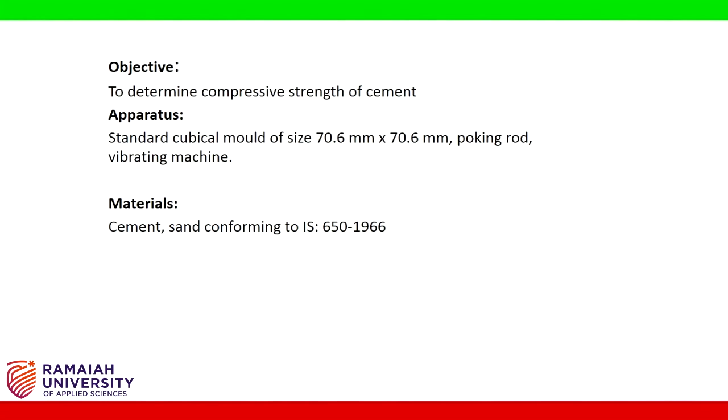Hello friends, with this experiment we are determining the compressive strength of the given sample of cement. Apparatus: standard cubical mold of size 70.6 mm x 70.6 mm, poking rod, vibrating machine. Materials: cement, sand conforming to IS 650 1966.

Strength test is not made on cement paste because of the difficulties of excessive shrinkage and subsequent cracking of neat cement paste. Hence, strength is found indirectly by conducting test on cement sand mortar cubes. The sand to be used for the mortar shall be a mixture in equal parts of grade 1, 2 and 3 of Ennore sand, that is standard sand. The ratio of cement to sand in the mortar shall be 1:3 by weight.

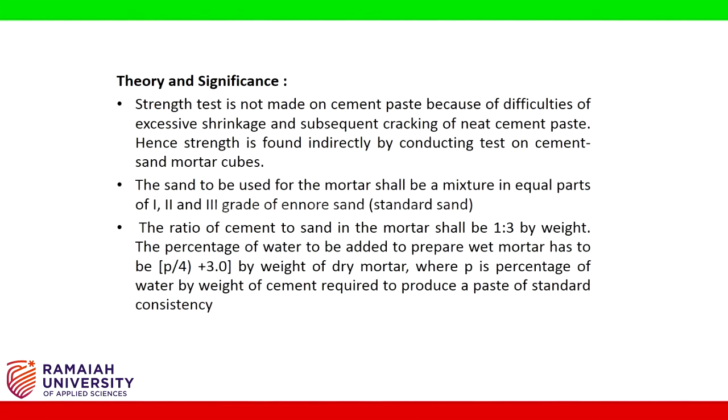The percentage of water to be added to prepare wet mortar has to be P/4 + 3 by weight of dry mortar, where P is the percentage of water by weight of cement required to produce a paste of standard consistency. Procedure: preparation of test specimens. Clean appliances shall be used for mixing, and the temperature of water and that of the test room at the time when the above operations are being performed shall be 27 ± 2 degrees Celsius. Potable or distilled water shall be used in preparing the cubes.

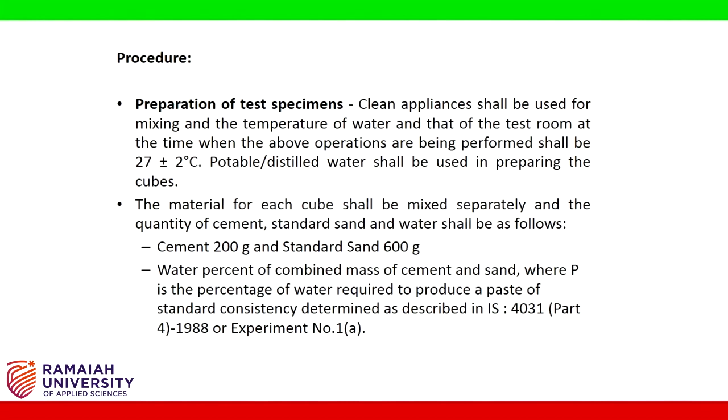The material for each cube shall be mixed separately, and the quantity of cement, standard sand and water shall be as follows: cement 200 grams and standard sand 600 grams. Water (P/4 + 3) percent of combined mass of cement and sand, where P is the percentage of water required to produce a paste of standard consistency, determined as described in IS 4031 Part 4 1988 or experiment number 1A.

Place on a non-porous plate a mixture of cement and standard sand. Mix it dry with a trowel for 1 minute and then with water until the mixture is of uniform color. The quantity of water to be used shall be as specified in step 2. The time of mixing shall in any event be not less than 3 minutes, and should the time taken to obtain a uniform color exceed 4 minutes, the mixture shall be rejected and the operation repeated with a fresh quantity of cement, sand and water.

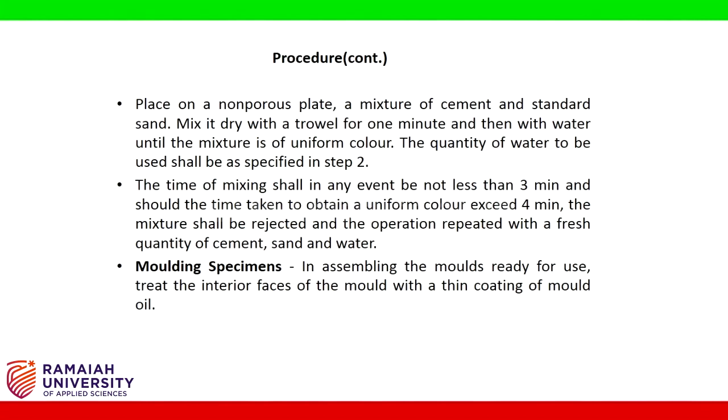Molding specimens. In assembling the molds ready for use, treat the interior faces of the mold with a thin coating of mold oil. Place the assembled mold on the top of the table of the vibration machine and hold it firmly in position by means of a suitable clamp. Attach a hopper of suitable size and shape securely at the top of the mold to facilitate filling, and this hopper shall not be removed until the completion of the vibration period.

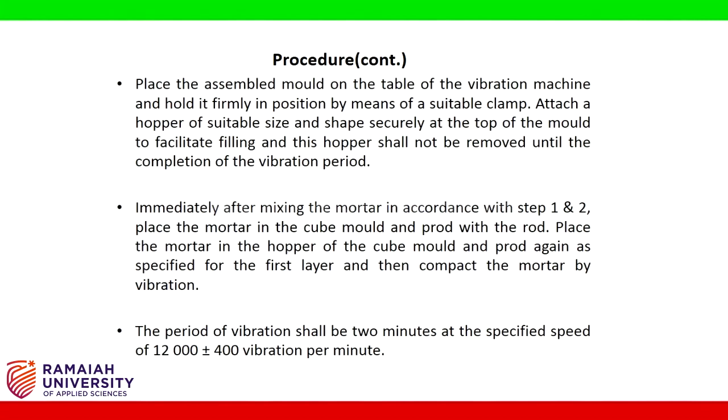Immediately after mixing the mortar in accordance with step 1 and 2, place the mortar in the cube mold and prod with the rod. Place the mortar in the hopper of the cube mold and prod again as specified for the first layer, and then compact the mortar by vibration. The period of vibration shall be 2 minutes at the specified speed of 12,000 ± 400 vibrations per minute. At the end of vibration, remove the mold together with the base plate from the machine and finish the top surface of the cube in the mold by smoothing the surface with the blade of a trowel.

Curing specimens. Keep the filled molds in moist closet or moist room for 24 ± 1 hour after completion of vibration. At the end of that period, remove them from the molds and immediately submerge in clean fresh water and keep there until taken out just prior to breaking. The water in which the cubes are submerged shall be renewed every 7 days and shall be maintained at a temperature of 27 ± 2 degrees Celsius. After they have been taken out and until they are broken, the cubes shall not be allowed to become dry.

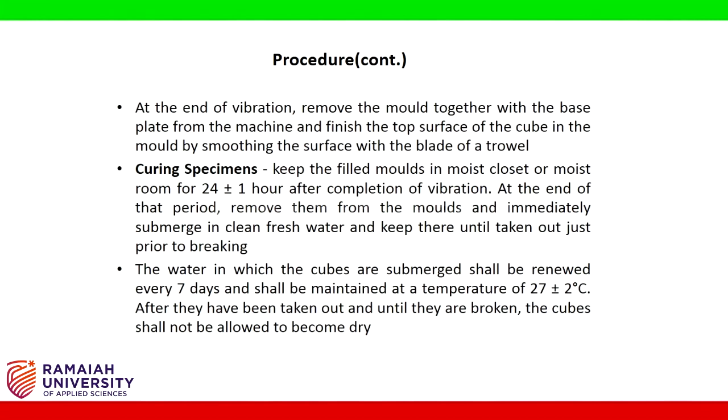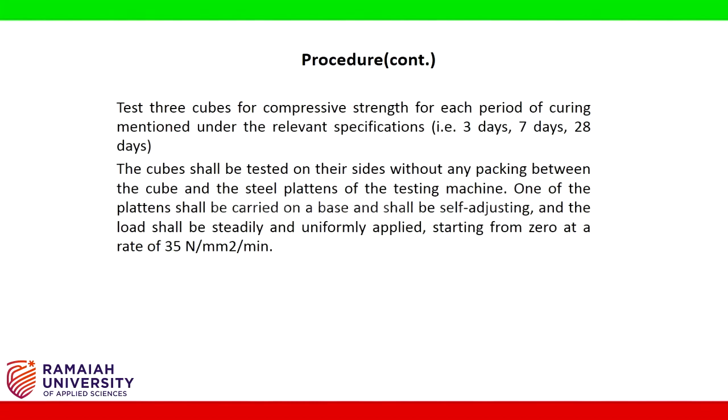Hi students, now we will be doing the experiment on the compressive strength of cement mortar cubes. So if you have come across the different grades of cement, like if I take up OPC, you have 33 grade cement, 43 grade cement and 53 grade cement. What does that number indicate? The number indicates the compressive strength of cement mortar cubes at the end of 28 days of curing. Okay, so now we are going to do the casting of a specimen and we are going to check the grade of cement which is used for that particular mix.

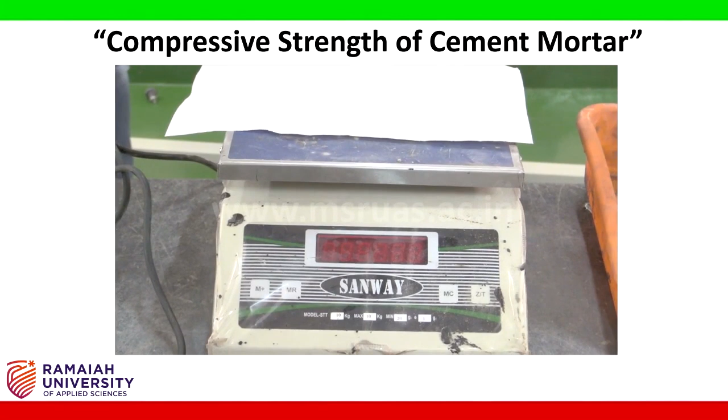So the apparatus required for this particular experiment is, one is the weigh balance of 1 gram accuracy, the cement, what I have taken is OPC 53 grade cement, sand, zone 2 sand has to be used, the mold, the mortar mold which is having a dimension of 70.6 by 70.6 and the base plate of it, mixing tray.

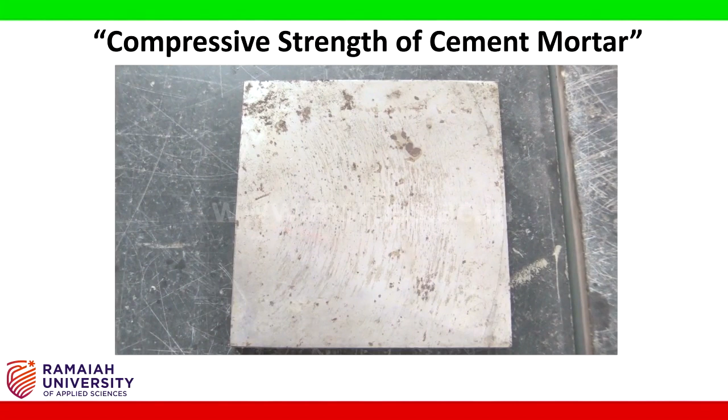We also want the gauging trowel and the water for preparing the mortar mix. Now let's start the experiment.

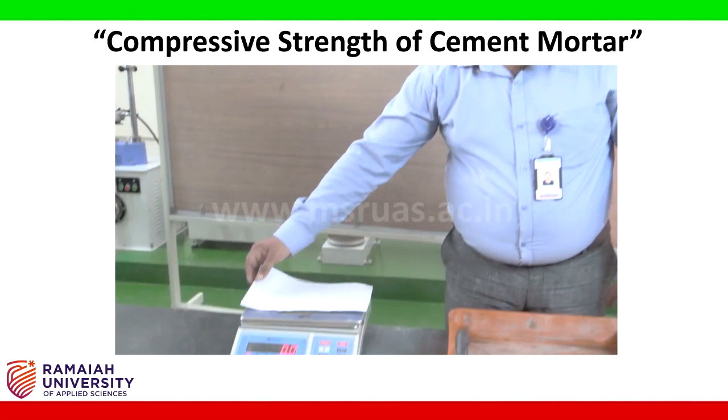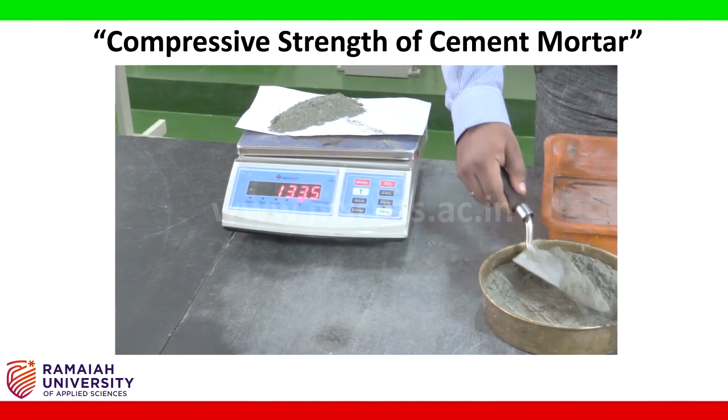I am going to take 200 grams of cement. I have taken 200 grams of cement.

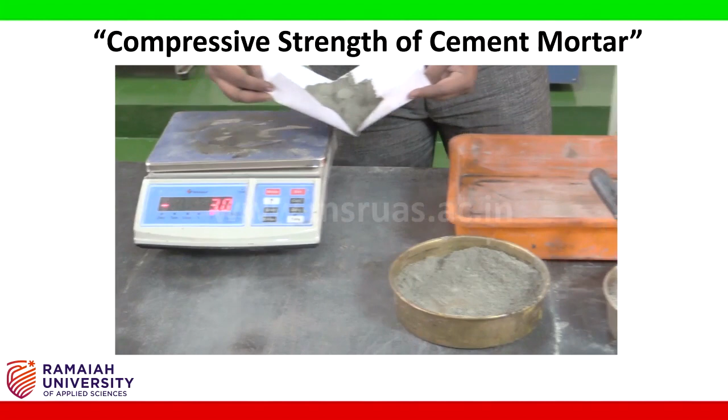I am also going to take up 600 grams of sand. If I take up 600 grams of sand, it becomes a ratio of 1:3, 200:600.

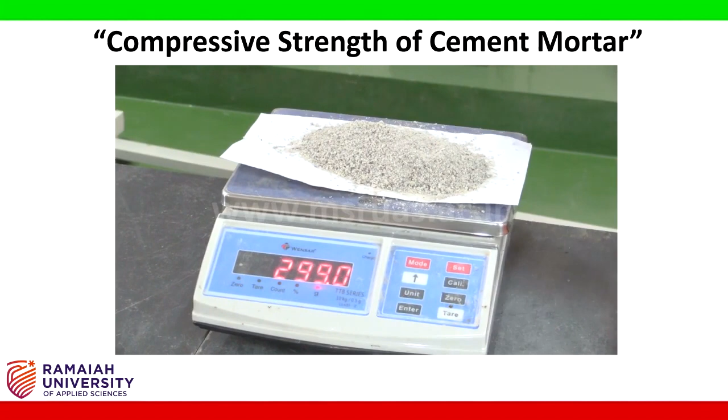I am going to add it in 2 stages. I am just adding 300 grams. Once again I am going to add 300 grams.

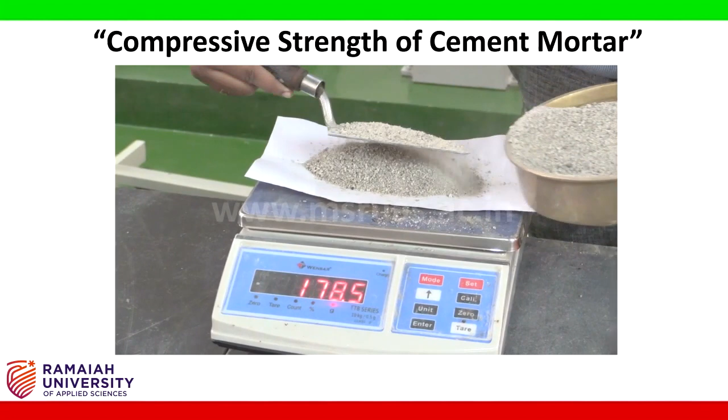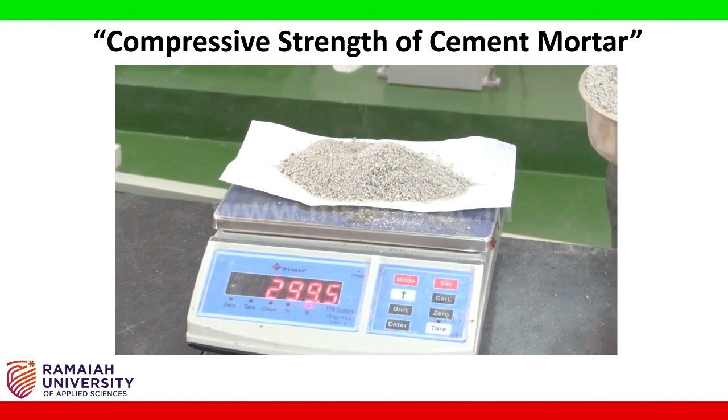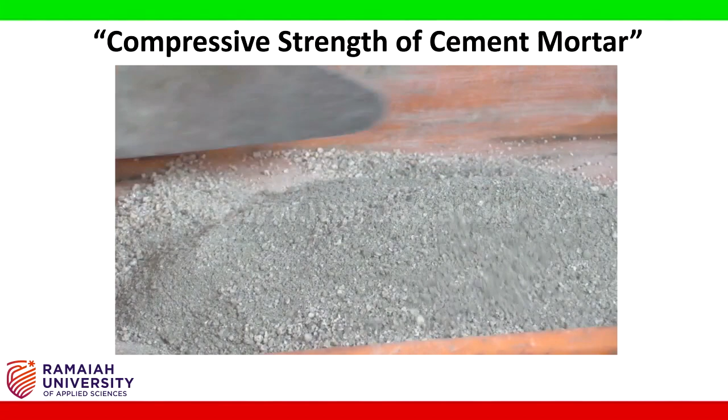I am going to dry mix the cement and fine aggregate sample. You can do this hand mixing or you can just go on with mixing the mortar using the mortar mixer.

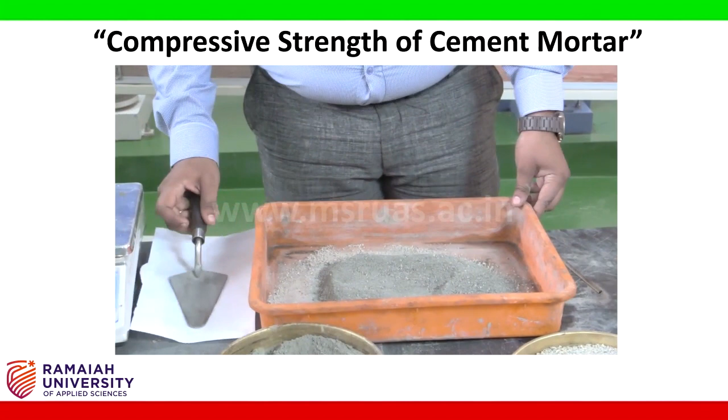Now I'm going to add the water to it. How much water is to be added? It will be P by 4 plus or minus 3%, where P is the normal consistency.

If the aggregate is in a wet condition, we are going to deduct minus 3%. If the aggregate is over dried, then we are going to add 3%. In our case it's a normal fine aggregate, so we are going to make sure that it will be added at P by 4 percentage.

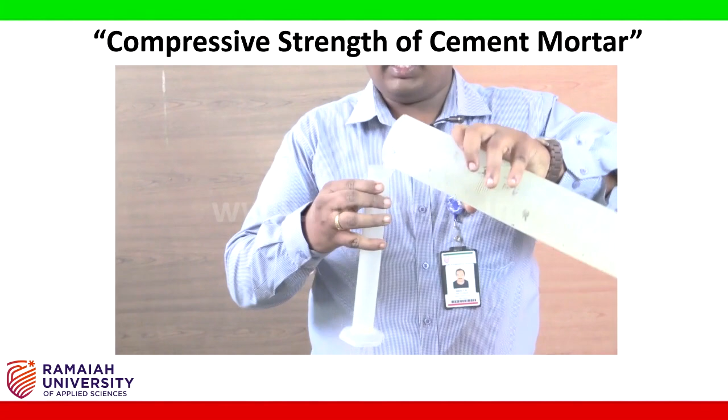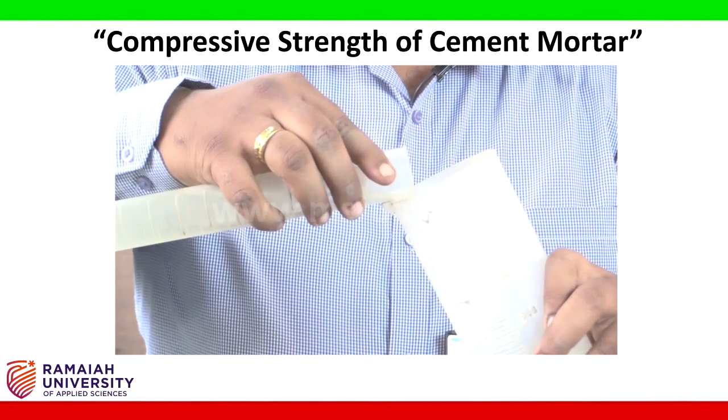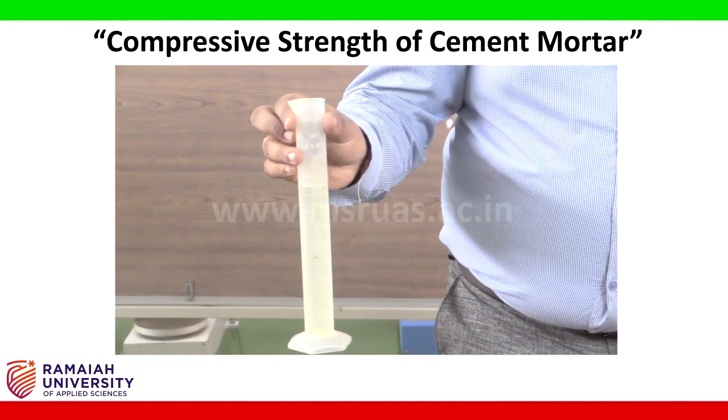So I calculated earlier, it will be 84 ml. I have taken 84 ml of water. I am going to add it to the dry mix

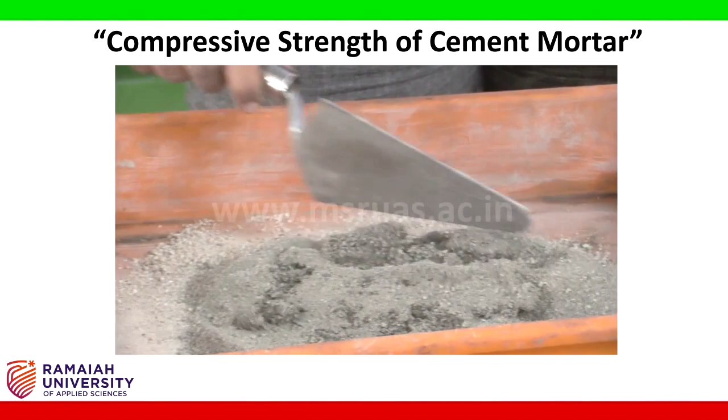and I am going to mix it well. This is a prepared mortar mix. So as I told you, we can just go with the manual mixing or we can go with the mixing

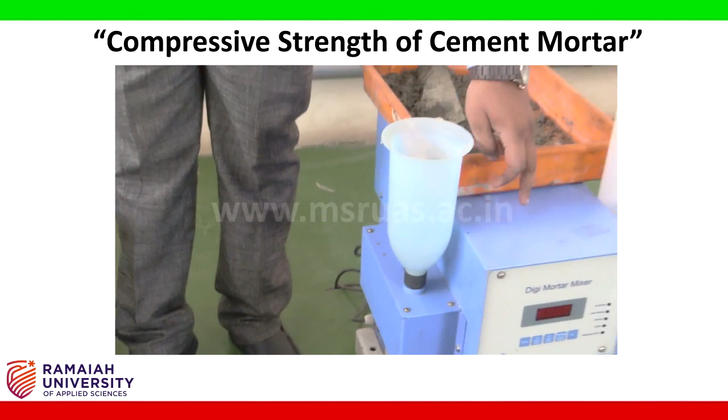using the Digi mortar mixer. But whatever technique you use for mixing, we are going to use the mortar vibrator for preparing the mortar cubes. I'll just go with explaining the parts of this mortar vibrator.

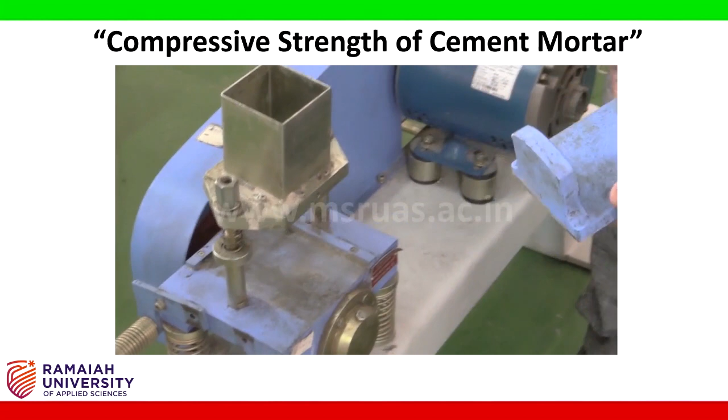This has a vibrating table and there is an arm to place your mold. You can just place your mold here on this particular arm, take it, place the mold, and put it inside.

Let us do it. So this is a mold. I am going to place the mold on this particular arm. I am going to tighten this.

It's now locked. I am going to place it on the mortar vibrator. I am going to tighten the screws.

After tightening the plate, what we are going to do is put the mortar into the hopper.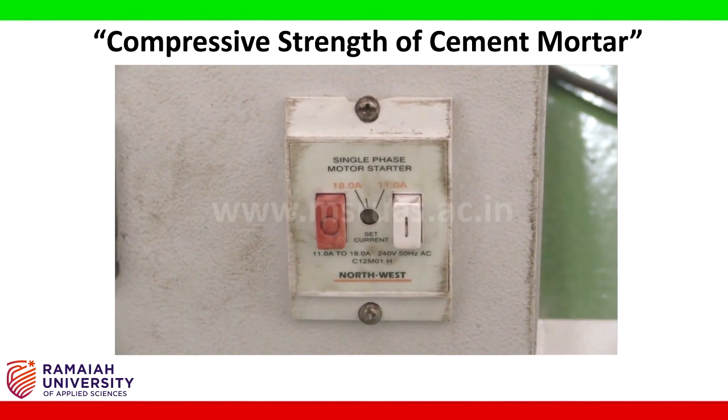Actually, I'll just put 50% of it and I'll turn on the machine. If I turn on the machine, it starts giving vibration.

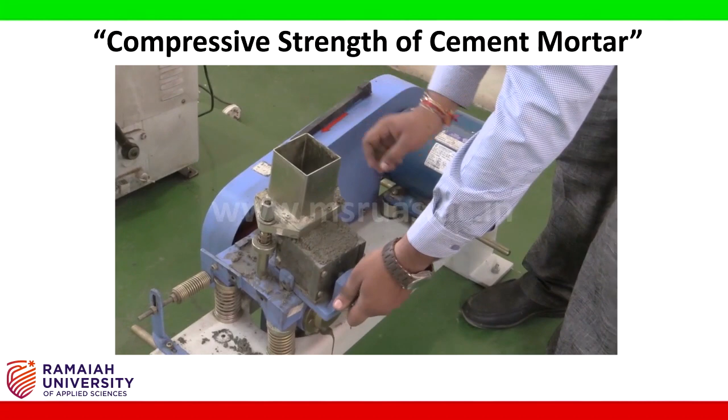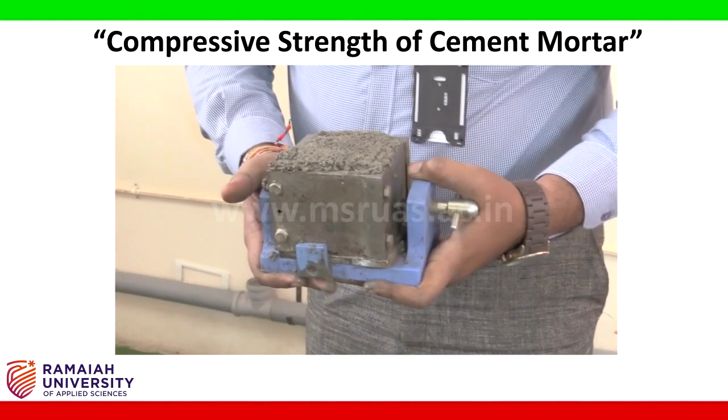So what I'll do is scoop the top surface, keep it in air for 24 hours, then I'm going to keep it in curing for 28 days. After curing it for 28 days, what you are going to get is a hardened specimen like this.

We are supposed to do the test for 3 samples to get an accurate result. What we are going to do is apply the compression load for this particular specimen. So this is a compression testing machine.

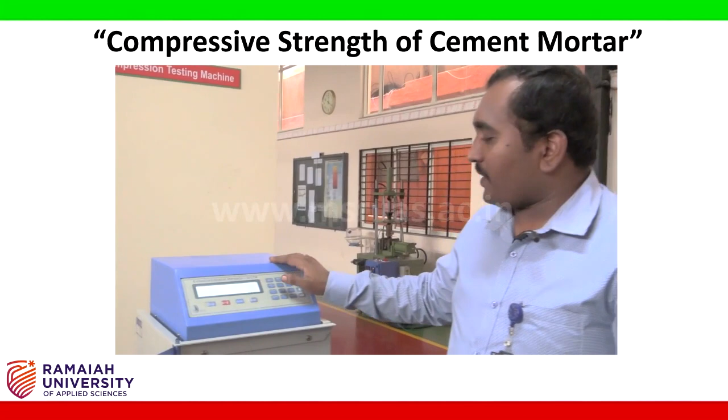After preparing the specimen, we will just go on with the operation of it. What we are going to do is take up the sample type. I'll just take up sample type.

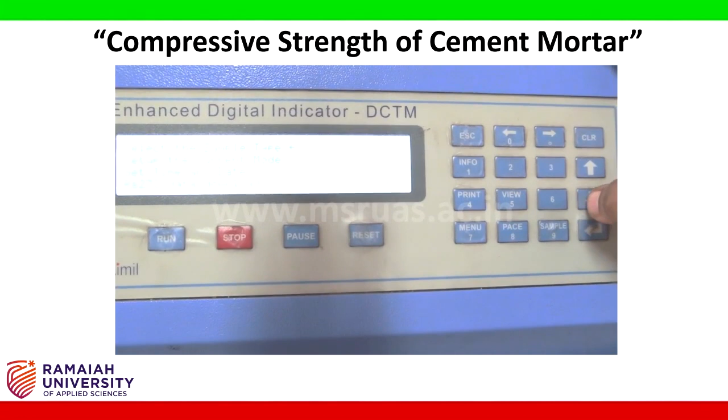I'll just put enter. It is either a cube, brick or cylinder. I'll go over here and feed the length of it, that is, this is having 7.05 centimeter.

Width same, that is 7.05 centimeter. Depth also same, it is 7.05 centimeter.

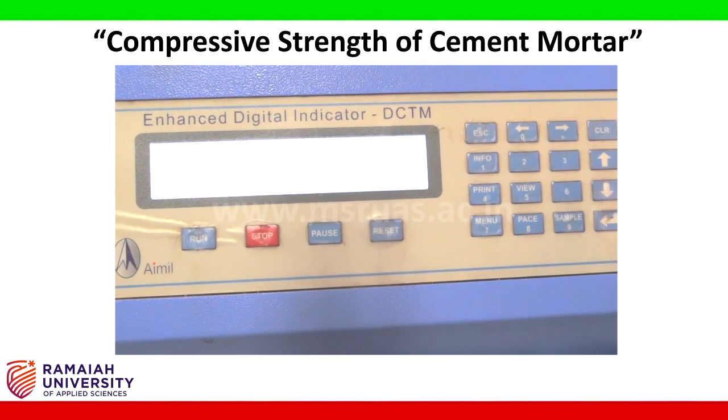So I'm going to give OK. I'm going to take up the operating mode that I want, a compression. I'll take up mode 1, enter. The unit will be in SI unit, and it shows the capacity of your machine and comes to the load thing.

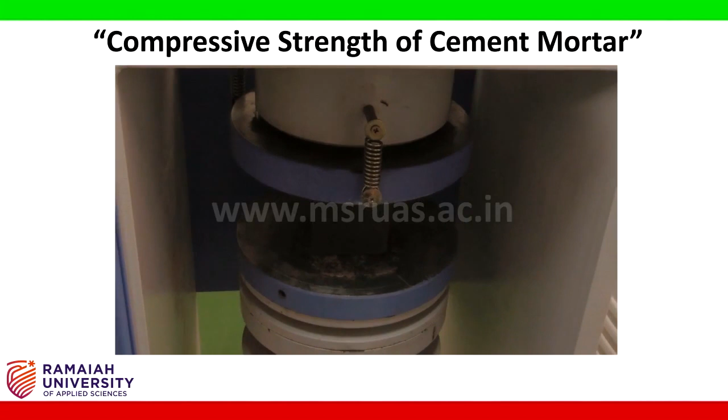What we are going to do is, after that, place the sample into the compression testing machine. This is the sample what we prepared. I am going to place it on the compression testing machine, and I am going to run the experiment.

So before running, make sure that your load release valve is locked completely and your emergency button is removed. Give a start command to your hydraulic jack and run the setup.

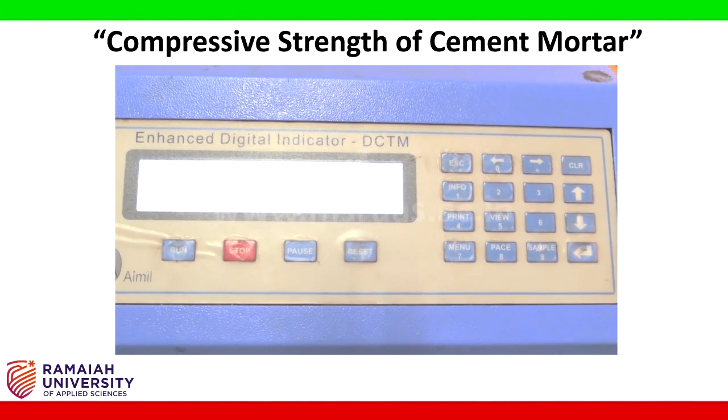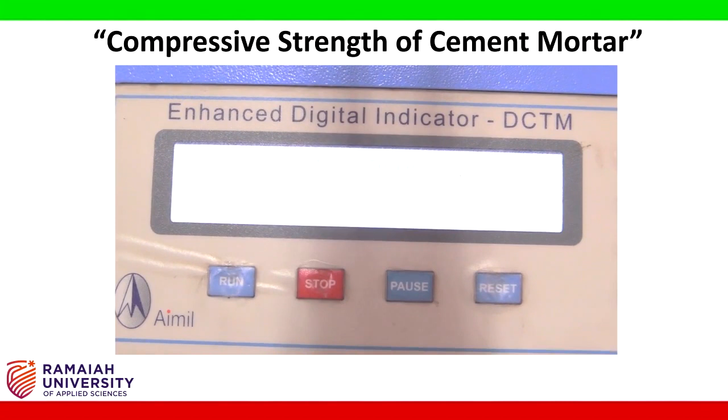It gives indication that the sample is broken. It is going to give you a peak load. So as I gave the area earlier, what it is going to do is directly calculate the peak stress.

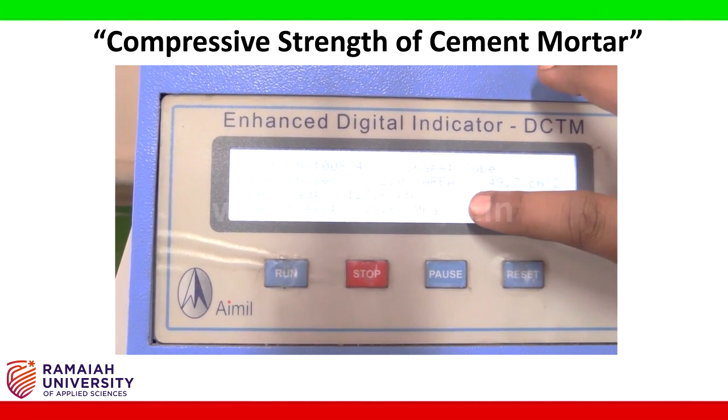Depending upon the compressive strength you are going to obtain, you are going to get the grade of the cement. Generally it will be more than 53 Newton per millimeter square for 53 grade cement. This completes your experiment, that is the compressive strength of cement mortar cubes.

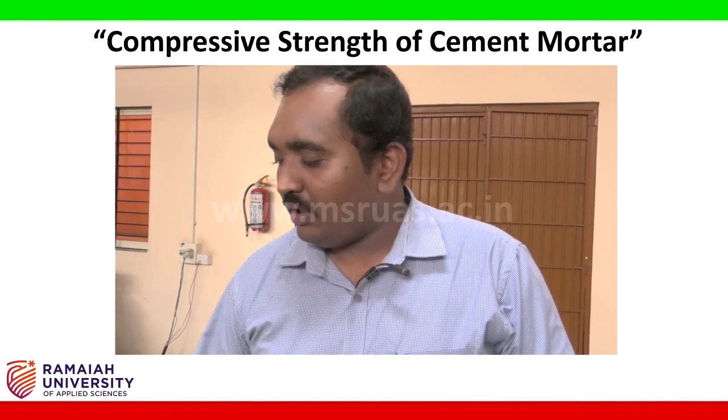If you just wanted to have a look at it, we'll have a look at the specimen which had been broken. So this is a broken specimen of prepared mortar cubes.